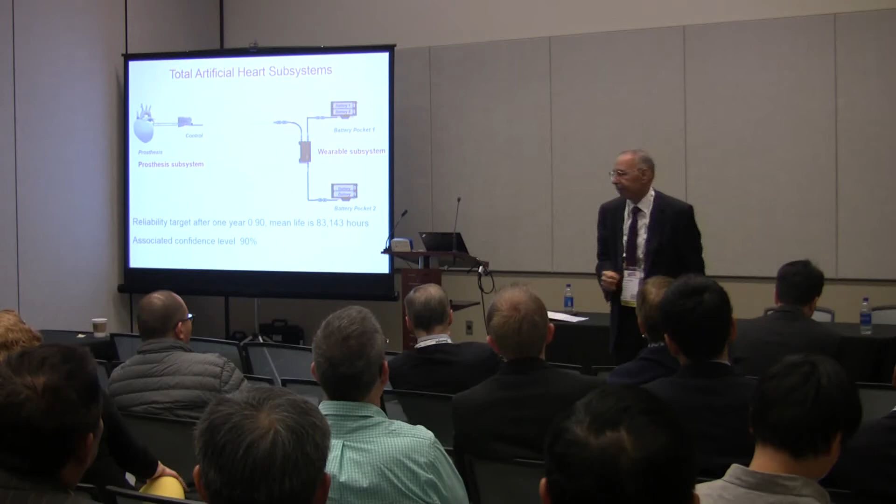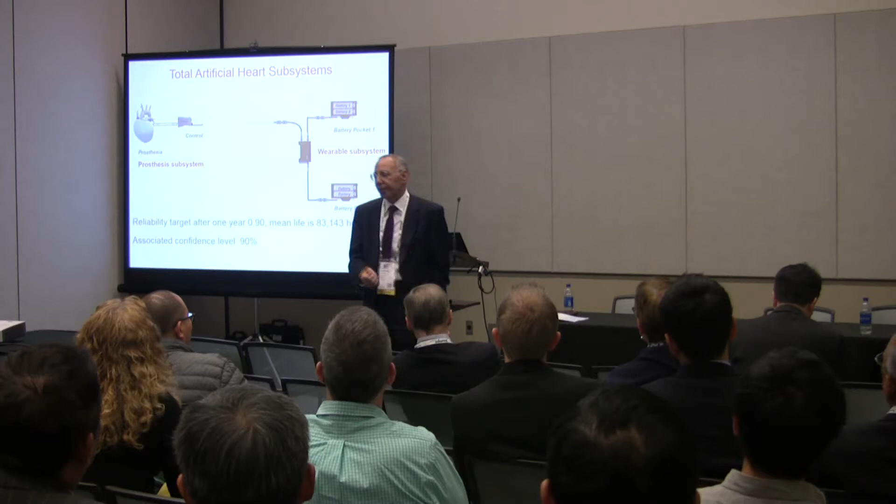So imagine you are going to go for a stress test. And the doctor said, well, run a stress test for you. So I put you on a treadmill and you keep running. How does it affect your heart? So imagine if you, instead of running or stress for 15 minutes, well, he forgets about you and you keep running for another hour or two. How does that affect you? Is it stressing the heart? What do you mean by this?

So imagine you are a runner and you keep running forever, never stop. Will your life be shorter? Why stress? Is it a stressful heart? So that became the questions where I struggled with. What do you mean by stressing the heart?

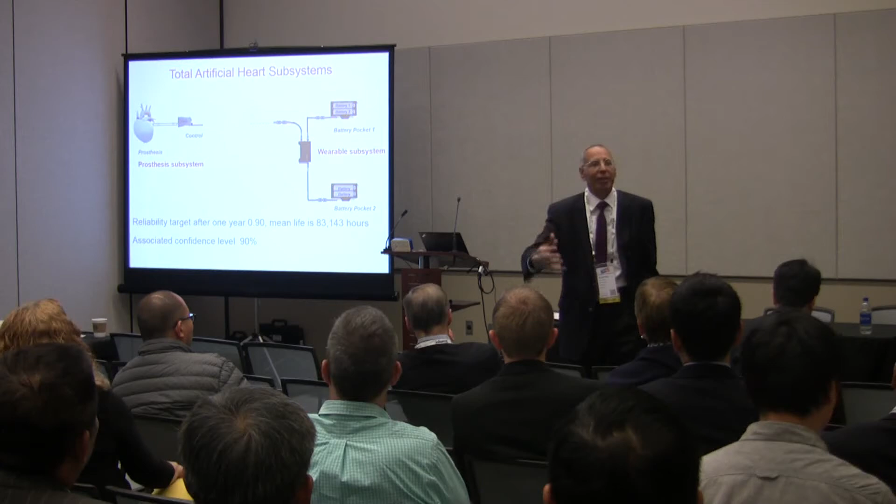So to avoid these issues, I spoke with the designers and said, well, really, this is implanted in a patient who is simply waiting in hospital, and we observe him until we find a heart replacement. So let's look at the profile of the patient during the time. And so this is what I try to do.

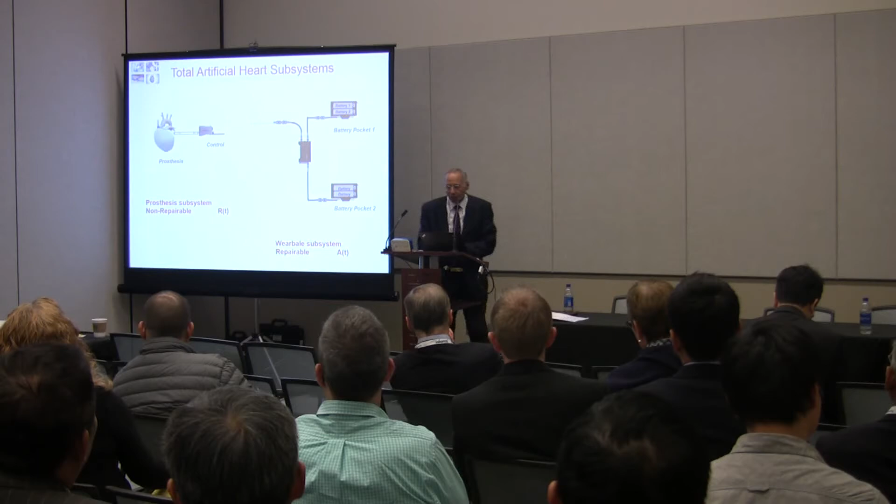Now, you can see every one of us has a different heart rate, more or less. Athletes have a much lower heart rate in general, about maybe 50 or 60 heartbeats per minute. Mine is especially low. It goes down to about 42 or 41, and occasionally it goes down to 30.

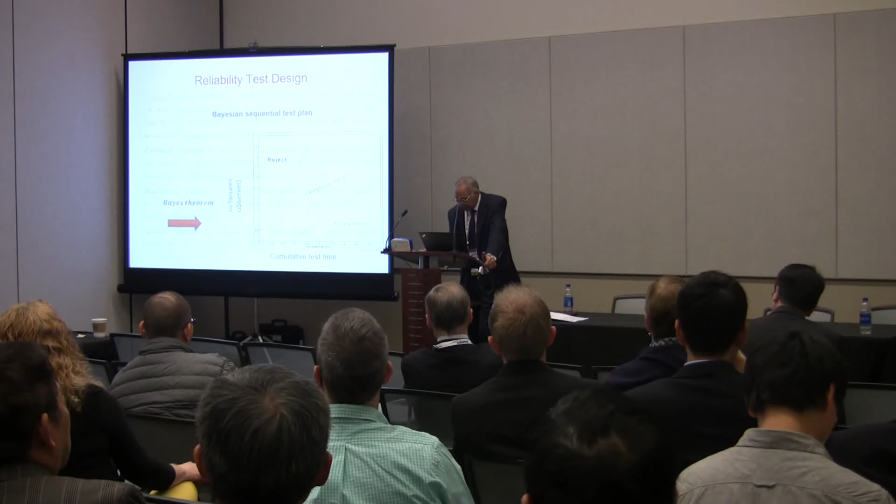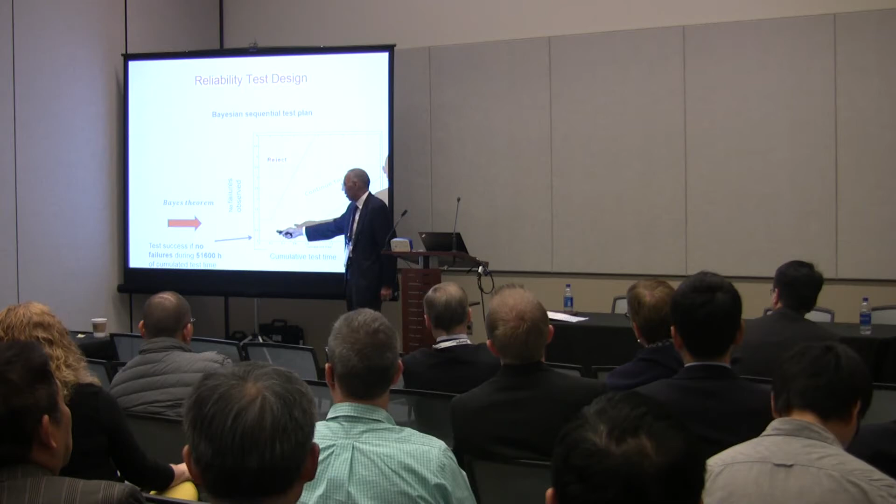So we designed a test plan for them and used sequential testing. We look at the number of failures observed versus cumulative test time, and we created boundaries for them. And we can tell when you reach so many operating hours without failure, you're going to meet the requirements. So the test succeeds if there are no failures during 51,600 hours of cumulative test time. FDA looked at the test plan in detail, and they approved to go ahead and conduct the test.

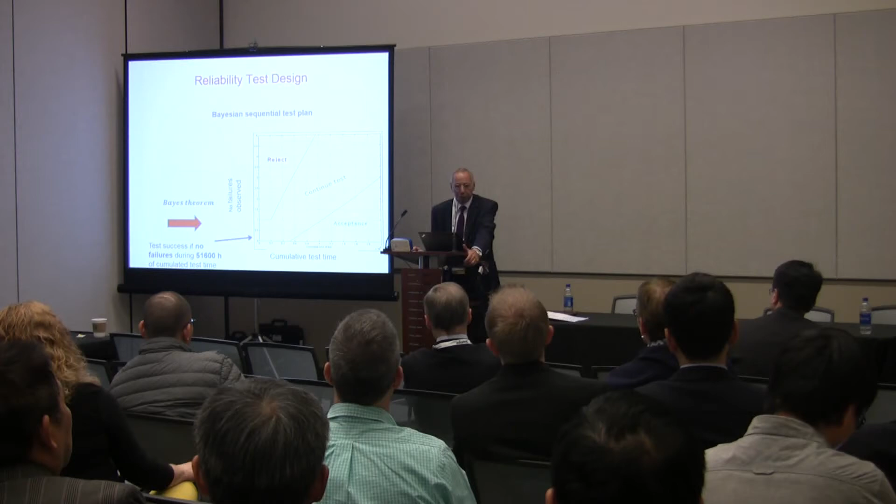What happens to all these components in the human body? Components means your heart and your lungs and your kidney and liver and joints. They function continuously. I mean, the heart never stops, right? And the same thing applies to your lungs and all other parts. Do they wear out? Will they eventually fail? They will. So what do we do?

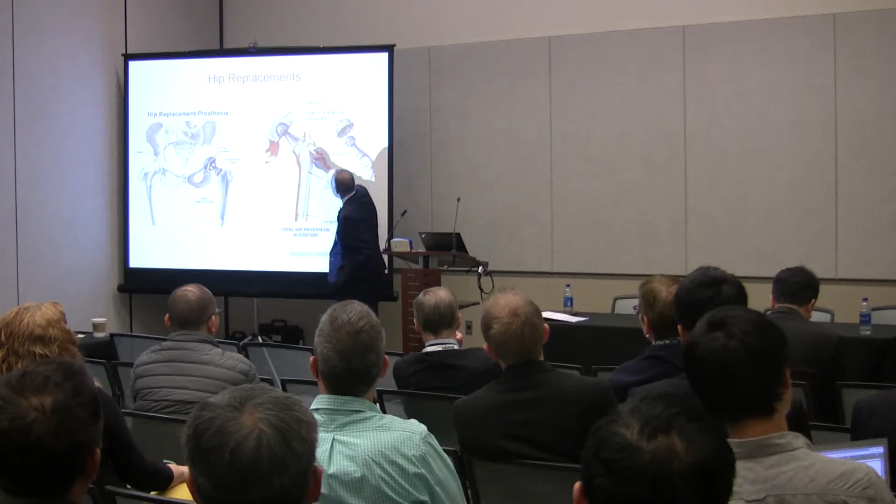So if you look at the hip replacement, it's nothing but a cup or a socket, and a ball, and this acts as a hinge. That's the area that gives you motion here. And this is a stem inserted in the thigh, cemented with a cement layer. So that gives you the motion and control.

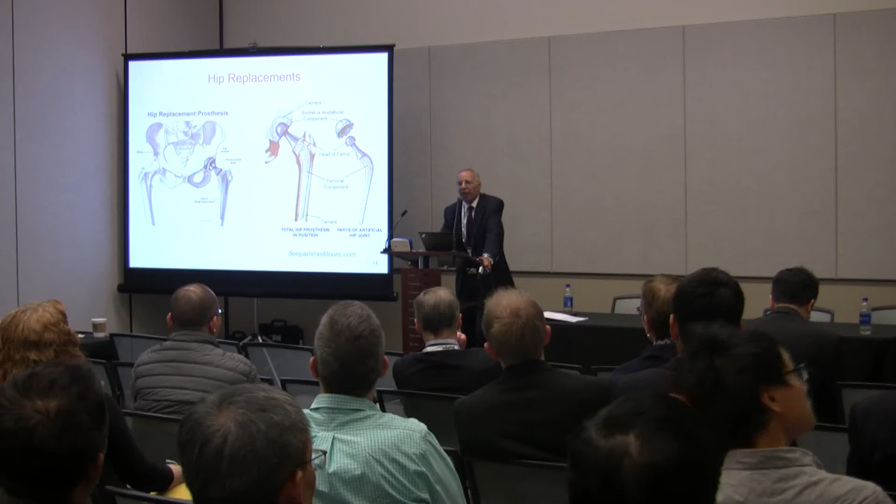So there are many, many operations run every year. And many companies make these joints, except they fail. So if you look at the failure and the revision, it's significant. It can go up to 10%. People go back for the joint replacement and need to replace it again, multiple times. And there are many reasons for this. So it's a high percent revision rate.

Why can't you design it, build it, insert it once, and sign a lifetime warranty? Don't come back. Can you do that? Of course you can. It can be done. So the goal of the work you could do is, can you improve reliabilities of these so there is no revision? It's a costly process. For a patient, it's a painful process. You have to go back. For a society, you are paying more and more for the same operation.

So I looked at what companies do. There's a company in New Jersey called Stryker. They make joints. There's a recall for a joint. I can't recall your car, but I'm recalling you. Come back. We need to replace your joint. That's a painful process, right? So what happens? The lawyers in the region jump into this. We'll sue this company. We'll get your money back and more. And everybody has this kind of socket come back. So it became another problem.

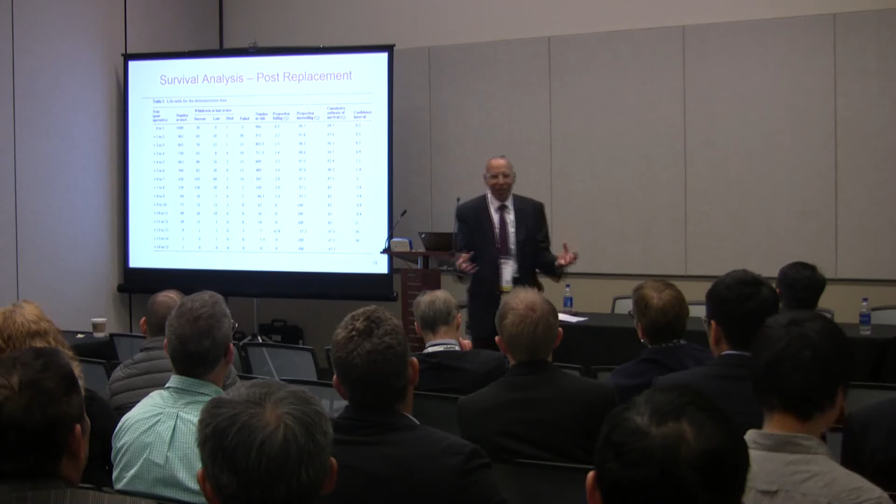So here, the best the medical communities have done is post-operation data collection. So many patients went through this surgery. There are 1,000 people at the beginning of the period; they observe them after the operation and see how many succeeded and are still working, how many left, how many failed, the number at risk at any time, and they use the Kaplan-Meier approach to get a simple survival curve. There's no prediction, no guarantee about these units. I built it, I inserted it in your knee or your hip, and I'm going to observe you. Well, if it fails, I recall you, but it's too late.

As a patient, when you go for heart surgery and they tell you they'll get you a new artificial heart, you ask them, what is the expected life? Is expected life a good measure for you? They tell you it's about 2 years. That's a mean life. Would you insert something critical in your body when you only know the mean is 2 years? Of course not, right? Lives between 0 and 4 will give you a mean of 2. If you put it in, it could fail right away. So they use different measures, like the time to first failure. When you have a batch of units produced, when will the first unit fail?

So same situation here. They are already implanted, and we observe the time and look at the time when it fails. Well, it ends up to be a curve that has no value. This is your reliability function. I don't know much with this. It's 15 years of study, and they end up showing how the people behaved at the survival function. It doesn't tell you much.

So if you want to design a new hip replacement or knee replacement, you need to know the cause of failure or failure modes. The first one, aseptic loosening or instability. This happens when the joint becomes loose. It's called aseptic, meaning there is no bacteria causing any infection. So bone remodeling around the area due to stress shielding.

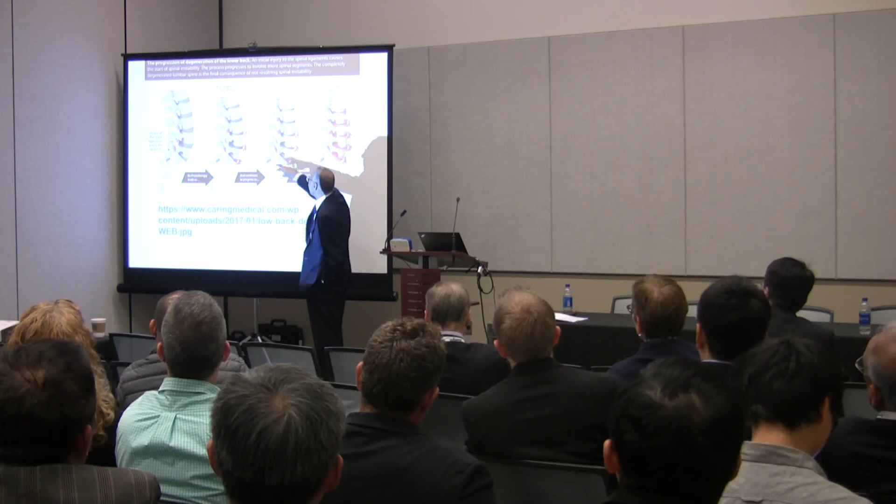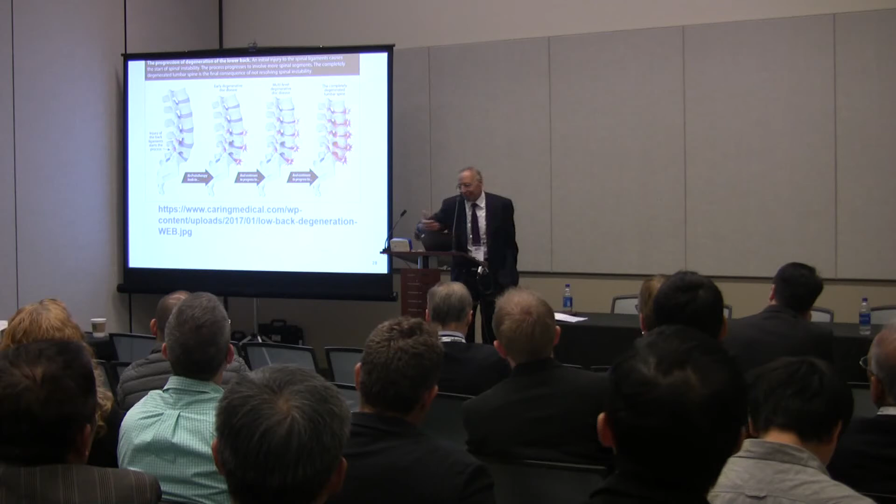So here is what happens in the spine disc. It starts somewhere and with time propagates, until you reach a point where the threshold level comes, you can't move anymore. Time for operation. So what is the threshold level for replacement or change? I don't know. So that took me mathematically to a problem.

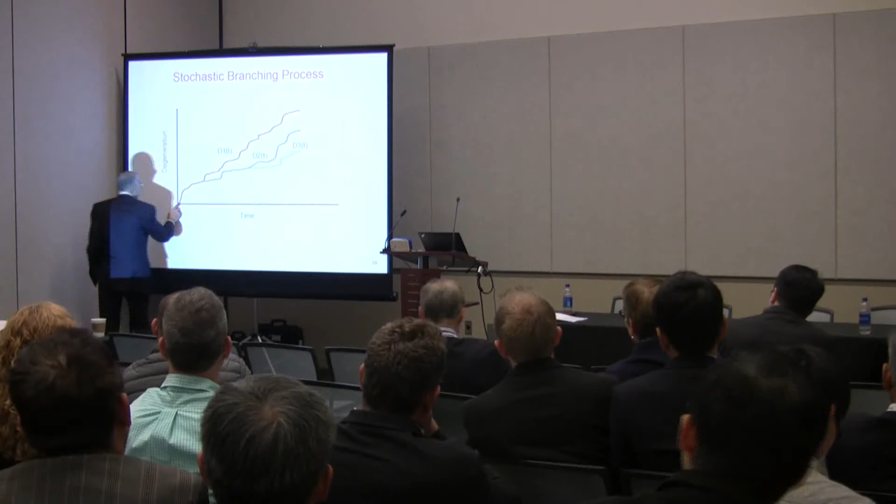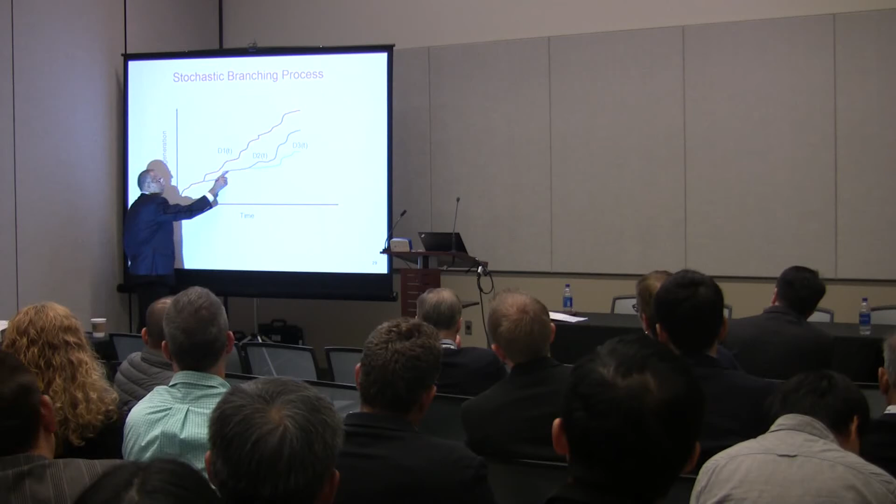Imagine you're measuring the degradation or degeneration of a disc with time. So at time 0, you're okay. Time passes, the first disc degenerates. At a certain point of time, it actually propagates the pain or degeneration to the next disc, disc 2. The first one is getting worse, still degenerating. The second one, after some time, propagates to the third one. The second one is still progressing.

This is a degradation process, a branching degradation process. There's no work on that. The best work I've seen in branching degradation processes of Brownian motion is what's called a terminating propagation process: after one terminates, the other one begins. But there is no study in the statistical literature or any literature that does branching of degradation processes. So it's a theoretical research problem, and you can formulate it. I give it an attempt here.

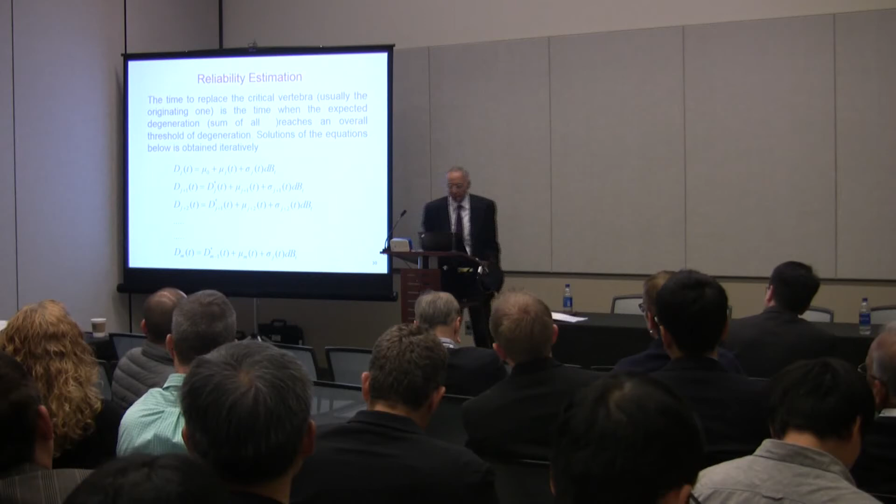Again, there's a time delay between these. So you can say the degeneration of disc J at time t has a certain initial value, or it could be 0, and mu is the mean value, and again, it's a Brownian motion process. It has a diffusion parameter and Brownian motion coefficient. At interval 2, the first one continues to degrade, the second one propagates, and you keep adding cumulatively. Mathematically, I don't know yet the formulation, but these are thoughts of potential problems to be addressed. Well, so where do you go?

As engineers, many of you are asked what you do. I said I'm doing 3D printing. Very good, here's the chance: do 3D printing of this material. Okay, here's what I'm going to tell you. So we do 3D printing.

So I'm going to take you through the theoretical modeling of this, which I explained some of. You need derivations and mathematical modeling of reliability before you do any of this work. Second, you need to know how to actually make a product, a joint replacement. Third, you need to test how long, how many samples, and then eventually, when you make a unit, you're going to say, this is a unit and no revision. It's perfect, right? That's what we could do.

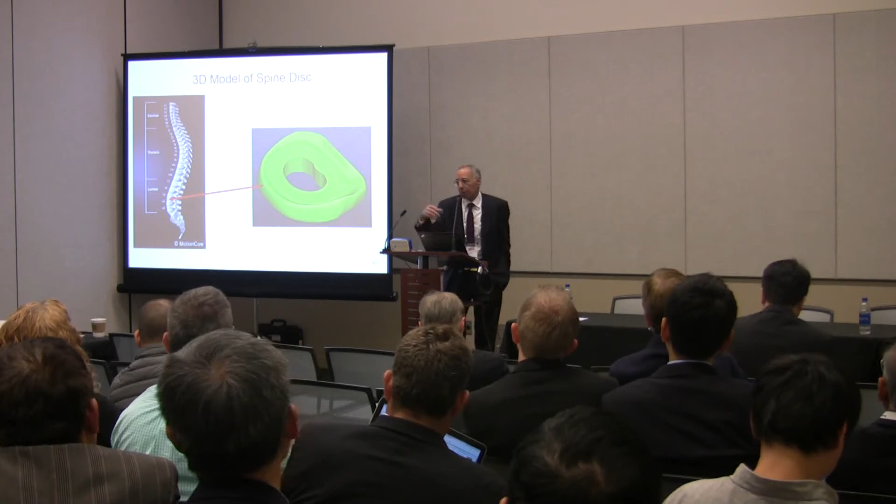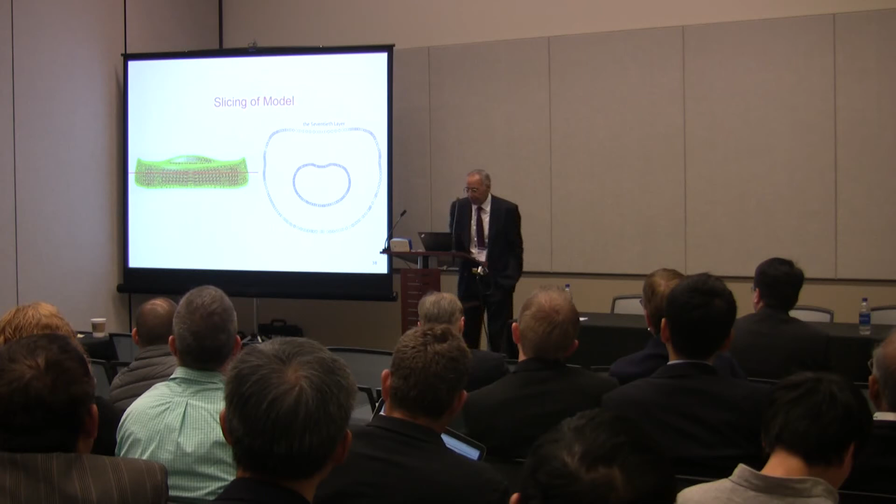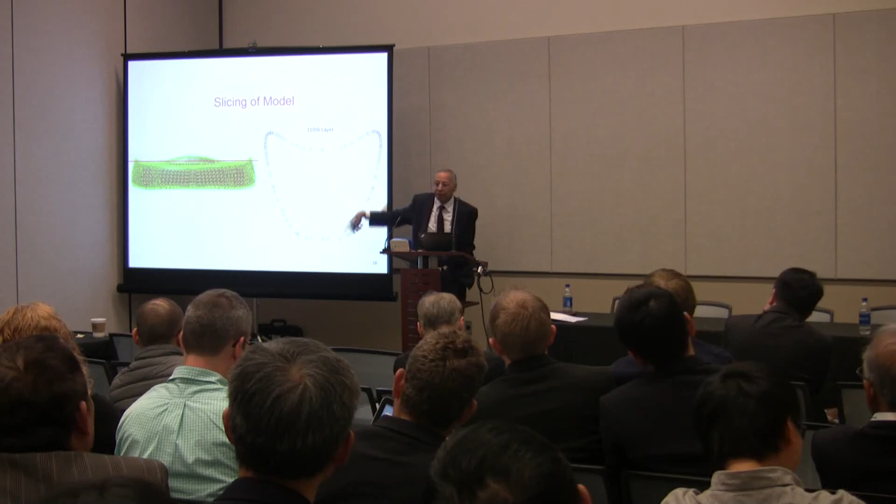So imagine you look at this. We dissect, we slice the disc layer by layer, and look at the geometry. You can go up to 600 layers with this, and every layer is different. This is the 90th layer. This is vertical, still slicing. This is the 110th layer, what it looks like. This is the geometry. This is the 50th vertical, so we go vertically and slice it to see how it looks.

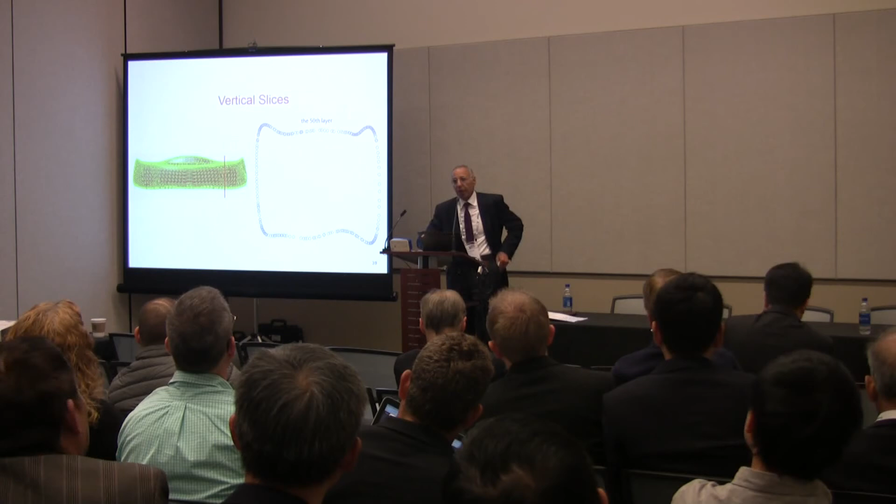So you can actually slice it in horizontal and vertical directions and do exact geometry. Now, the material choice becomes a challenge: what material to use and how you deposit it. And the problem with the polymer and 3D printing is the different characteristics of the layers. Polymers tend to have a high expansion coefficient.

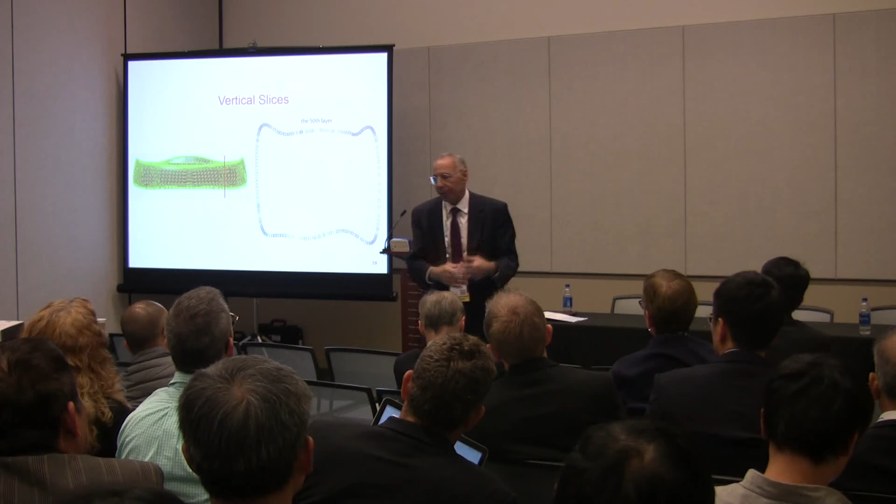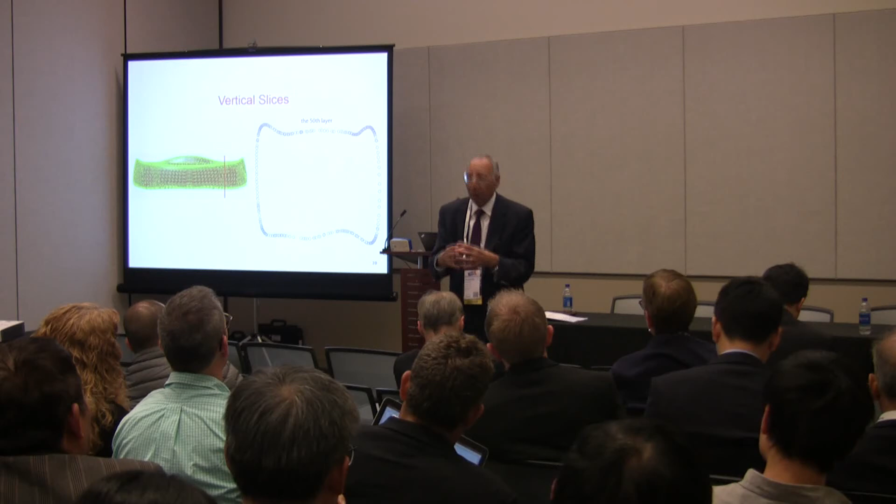So I have made a part with 3D printing for a different project, and I have metal pieces inserted in it. And what's close to the source of heat, because I'm heating the medium before it goes in, the metal pieces were press-fit into the polymer. With time, all of a sudden my metal pieces are falling off from that material because the polymer expanded and does not hold. So there is lots of thermal variability. If you put different layers, you've got to know how they behave with each other.

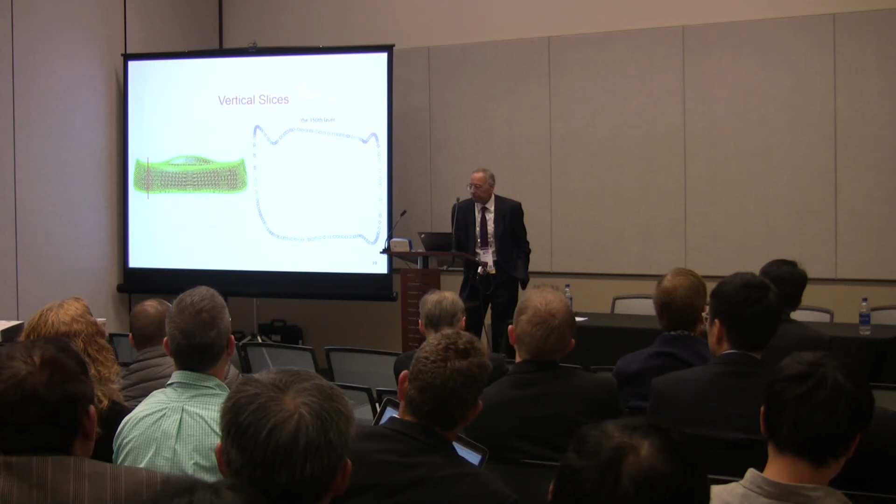So these are, again, vertical slices at different locations. And you go on, and here is what the geometry looks like at the end, multi-layers. And I can give you an STL file. You go ahead and produce it. Well, what material, what layers, that's what you do. Most of you say I'm working in 3D additive manufacturing. Produce this one, right? It's a challenge, right?

In fact, the geometry: if I want to create a scaffold with one string, with one fiber, I can create different patterns. Which one of these patterns has high strength? There's no optimization. I don't know how to optimize it, but I can come up with different layers, and every layer has a different pattern geometry.

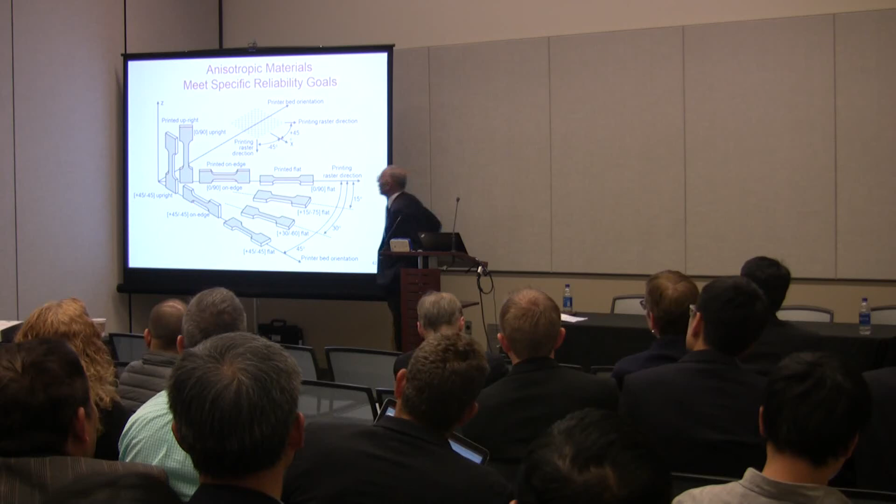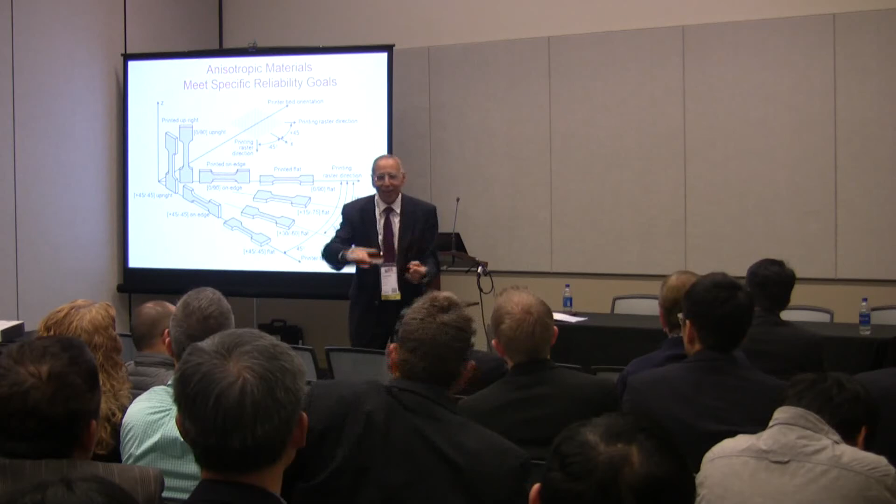So, the problem with 3D printing, as you know, is the anisotropic behavior of the material. If you have a piece made of metal, such as steel, you take pieces and you do tension on them in one direction, take another piece horizontal and you do tension, same yield strength, no variability. If you do this in 3D printing, lots of variability from one layer to the other. If you take a vertical piece or horizontal piece, that causes lots of strength property variability. So in one direction or the other direction, you'll have different curves, never the same strength.

When you put 3D layers of metals, once you put a layer, it's a molten layer first, and you put the second layer; if you wait for a fraction of a second, oxidation happens. And layers will never be uniform. So if you want to do testing with these, whether it's a fatigue test and so on, you're more likely to get cracks. How do you minimize the impact of that? So with 3D printing, people are promising too much, but the material end has not been done carefully yet to address that.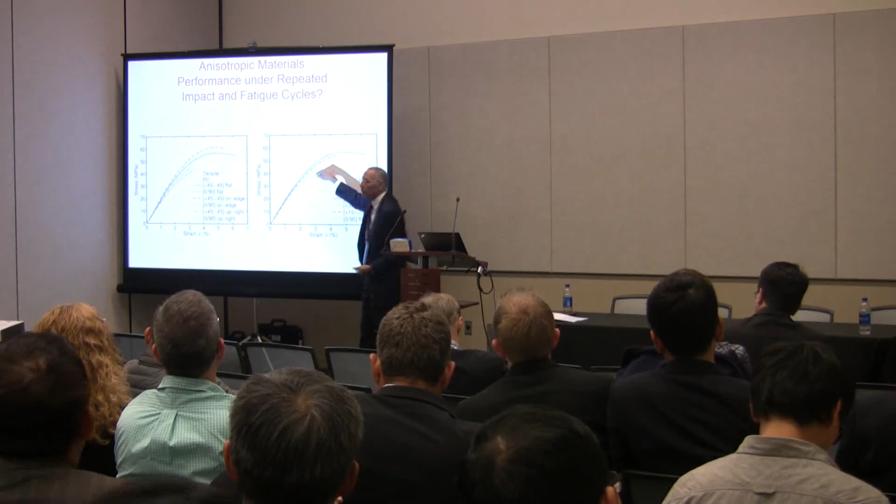Indeed, here's the different material. This is looking at the stresses, and this is the strain. This is typical when you take a material, test it, and plot a stress-strain curve, and you look at this different material from different 45 angle, flats. And look at the material, the properties change; one direction goes higher, the other direction lower. That's the issue we have in 3D printing.

No reliability estimates. So people have joints, have all kinds of material, and you tell them, give me a warranty policy on that. None exists. When will it fail? Nobody knows. So I think you can play a role in reliability. What to do? You test. Make samples, make products with expertise in 3D additive manufacturing, expertise in statistical modeling, and reliability. You can come up with new material, new joints that will have longer life than what we have today.

So let me summarize this here. Am I almost done? Okay, summary. Even if you didn't gain much out of my presentation, at least you know there is a change in your body with age, and your bones are going to change, and you're going to be shorter. Sorry about that. And so you can model the degradation phenomena, even just ignoring human joints as such.